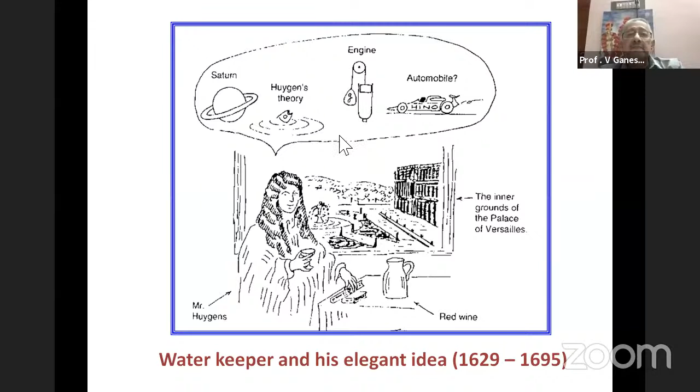And therefore the water keeper, his name was Huygens, thought that if he could have a mechanical means to lift the water from the well and pour it, it would have been wonderful. And this is the person, and his elegant idea came, as you see in this figure, and this is the engine he invented at that time.

This engine is called the gunpowder engine. This is the conceptual drawing for the internal combustion engine, which originated from Huygens in 1673.

Now, how exactly it works? If you see, you have A, B, C, D, etc. marked, and here is the place where he put the gunpowder, and this was the cylinder, and there was a piston. Huygens thought that if you could explode the gunpowder, the force will raise the piston up, and the bucket will come down and fetch water from the well.

And because he has provided the exhaust there, the exhaust gases will go out, there will be a vacuum, and the piston will come down. So by means of this reciprocating action of the piston in the cylinder, he could fetch water from the well and pour it. In the 1600s, it was considered a very elegant idea, and he utilized this principle to water the gardens.

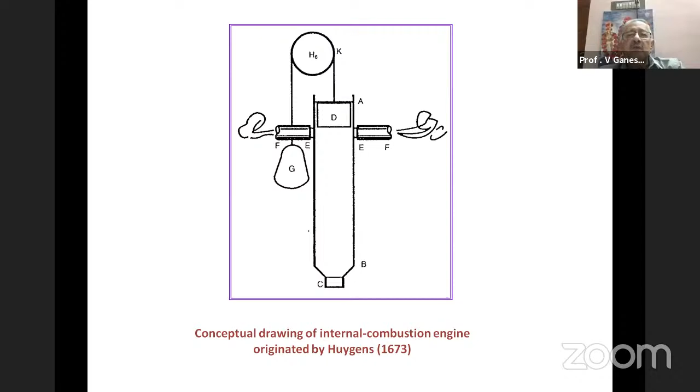Then what happened is, because of this invention, he could get into the mechanical means for getting some work done.

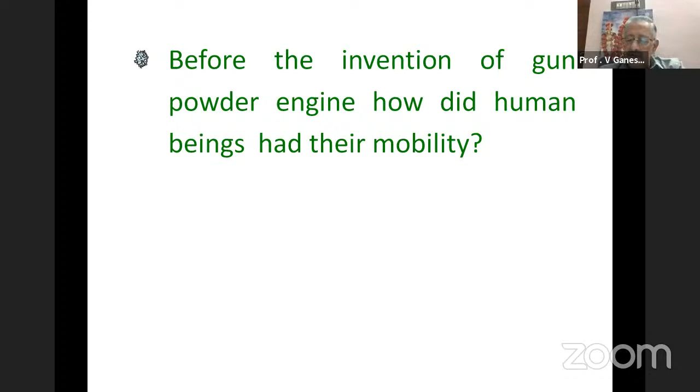But before the invention of the gunpowder engine, what did man use for mobility? If you see, it was through Shank's pony. Man utilized Shank's pony for mobility. But most of you may not be aware what Shank's pony is.

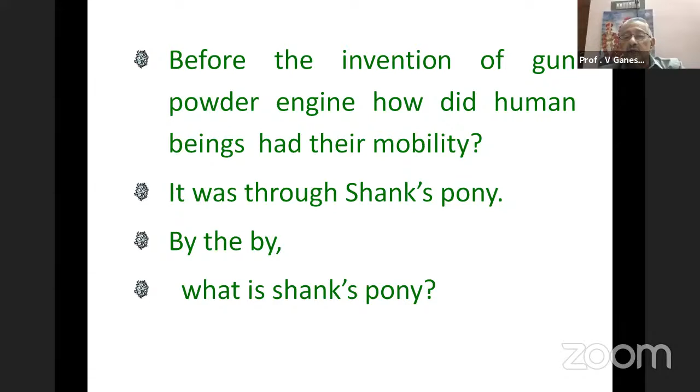I will show the next slide for a small duration, don't imagine too many things on that, and I will quickly pass on to that. This is what Shank's pony is, which is nothing but the human feet. The human feet was used for mobility.

Then people started using SUVs. SUV is nothing but the sport utility vehicle that we call it as the automobile or the car today. And if you see, a very interesting thing in the SUV, this is our original SUV that the man was using. And if you see this SUV and the present day car, verify it in your automobile, all the systems this original SUV had, we are having it in our automobiles run by engines.

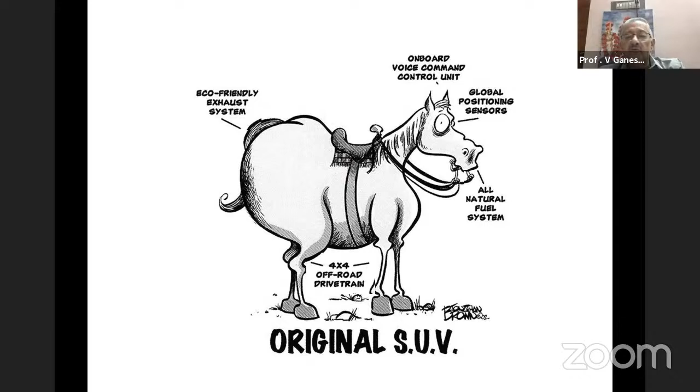Now, if you see, you have all natural fuel systems and eco-friendly exhaust system, then global positioning system, onboard voice command system, 4x4 off-road drivetrain, independent rear suspension system, a memory feature and braking, a strap and bit of steering, and luxury leather seating. And if you go and verify your automobile, all these systems are today available on your car.

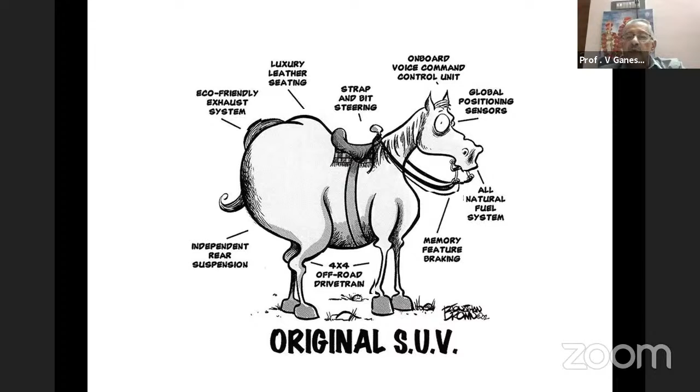So this is our original SUV, which man utilized for mobility, and we got rid of the horses and got into the engines today. So, but what is the problem of this SUV? Why could we not continue with the SUV? This SUV is mainly a problem because of pollution.

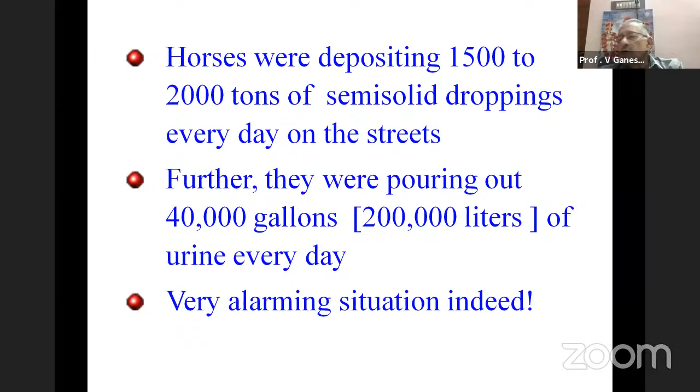What type of pollution did we face? The pollution that we faced is called the solid and liquid pollution. And from the literature, if you see, horses were dropping about 1,500 to 2,000 tons of semi-solid dropping every day on the street. And further, they were pouring about 200,000 liters of urine every day on the road. A very alarming situation it was, and people could not live with these horses because the number of horses was extremely large. So we wanted to get rid of these horses.

That means we faced pollution some 100, 200 years back, and today also we are blaming the automobile engineer for the same pollution.

Then what happened? Because man wanted to get rid of these horses, they wanted some mechanical means for transport, and then came the most interesting thing, the invention of two great pioneers. I would call them so great because today the entire world depends on automobiles. These two pioneers were named August Otto and Rudolf Diesel.

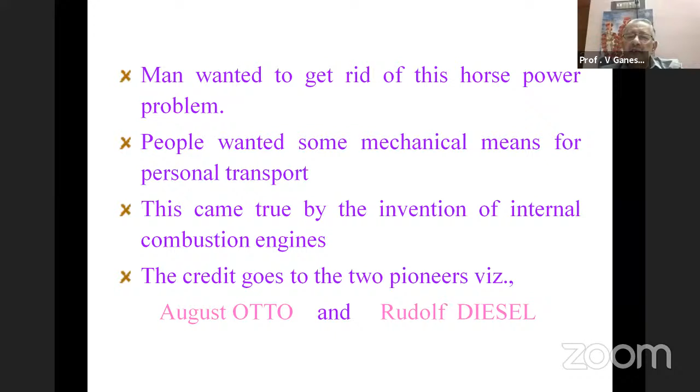Nicholas August Otto invented the spark ignition engine, which we call the petrol engine. And Rudolf Diesel invented the diesel engine. So if you see today, the cars or automobiles that we are using run basically on these two engines, and probably it's a great invention which has helped us for our mobility, but at the same time we are being blamed that this is mainly responsible for the pollution.

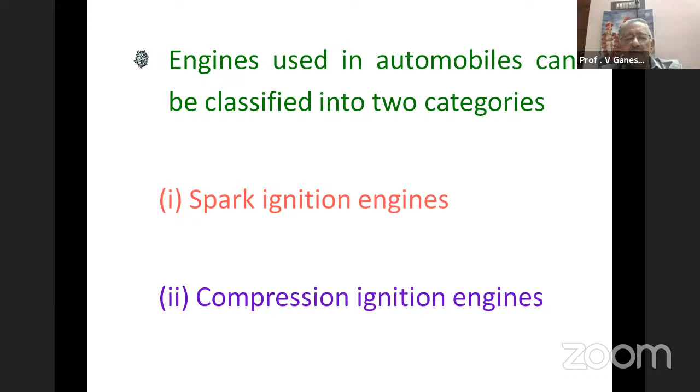So engines used in these automobiles as on today are of two types. One we call the spark ignition engine, and the other we call the compression ignition engine. And if you see the working principle of these two engines, they work on a 4-stroke, 5-event principle. Whether it is a petrol engine or a diesel engine, they work on the principle of 4 strokes and 5 events. These 4 strokes are suction, compression, expansion, and exhaust. In these 4 strokes, there are 5 events taking place.

The first event is the intake of air fuel mixture, and then compressing of the air fuel mixture. Then comes the combustion, and then expansion and exhaust. So there are two types of engines which use both the same 4-stroke and 5 events, namely suction, compression, combustion, expansion, and exhaust. And if you closely look at it, both of them are almost working on the same principle, whether it is a spark ignition engine or a compression ignition engine, the working principle is the same.

Many students used to ask me, sir, how to memorize which is the spark ignition engine and which is the compression ignition engine. What is the difference between them? They used to ask me, but I used to tell them very jovially: the difference between the spark ignition engine and the compression ignition engine is the difference between a love marriage and an arranged marriage. The spark ignition engine is the love married engine, and the compression ignition engine is an arranged marriage engine. Now, what exactly happens in this engine is what will happen to your life and all of our lives. For example, in the love marriage, what is taking place?

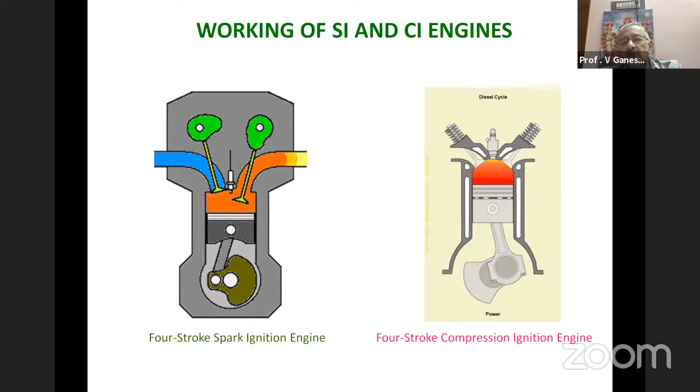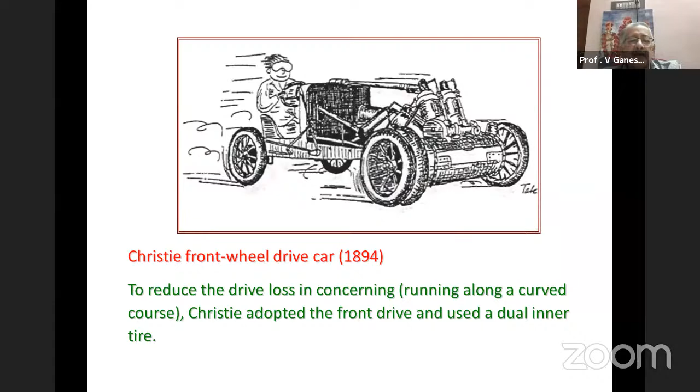The first horseless carriage came on American roads in 1895. Before 1895, people were using horses, and horses were polluting the atmosphere. After the invention of the petrol and diesel engine, in 1895 we could get the first automobile on the road. This is what it looked like in 1895.

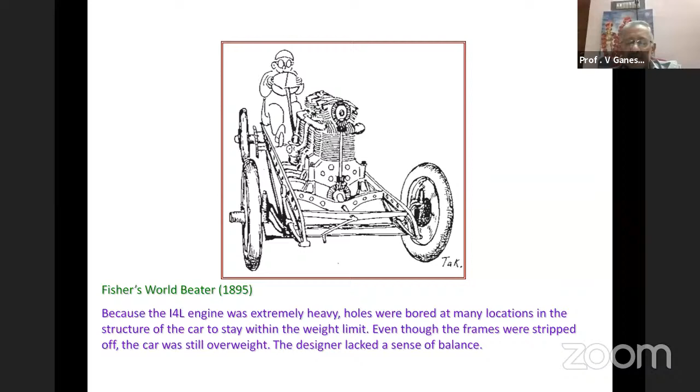Then a lot of advancement took place. But when the first automobile was seen on American roads, the US Congress, like our parliament, in 1895 gave this statement: they said that this discovery begins a new era in the history of civilization.

It said also, never in history has society been confronted with a power so full of potential danger, and at the same time so full of promise for the future of man and peace of the world. And they said the automobile is a wonderful invention, and one day it will become a great problem for society.

And today we are on the same road. As I said at the beginning, the horses were making pollution, dropping about 2,000 to 2,500 tons of semi-solid droppings on the road, polluting the atmosphere.

Today, if you take Chennai city, we have more than 1.5 million vehicles on the road every day, and we are polluting the atmosphere with products of combustion, more than 2,000 tons every day, in Chennai city alone. Also, these exhaust gases coming out of these engines are about 400 degrees centigrade, and that is increasing the temperature of the atmosphere.

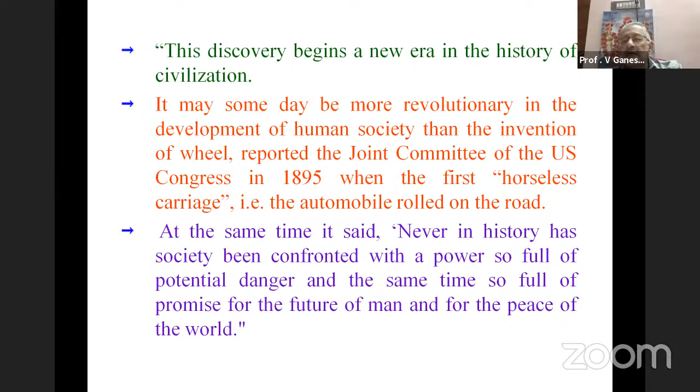And therefore, as they said, that one day this is going to be a problem — we are facing that problem today regarding pollution. So this statement became true today. It is believed that the automobile is the main contributory factor toward environmental pollution.

This puts the entire ecosystem under great strain. Pollution is putting the ecosystem under great strain, and therefore it becomes our duty to reduce this pollution.

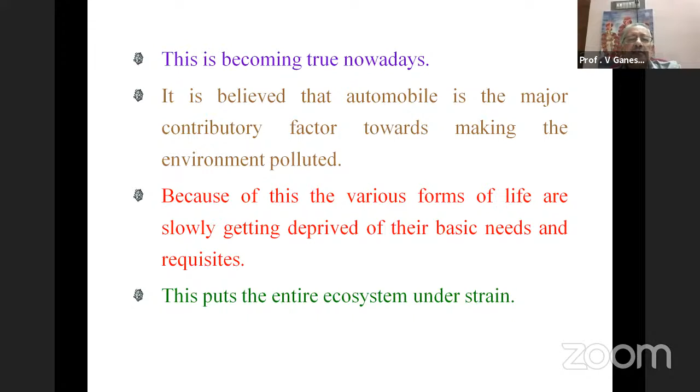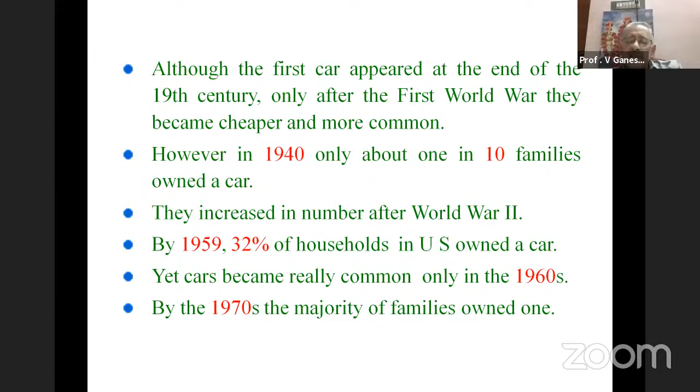If you go back into history, in 1940 only about one in 10 families owned a car, and this increased after World War II. By 1970, the majority of families owned a car. Today, probably one family owns 2 cars. That is the rate at which automobiles are being used, and there is a possibility that it will be a problem for atmospheric pollution.

People have started blaming automobile engineers for this pollution, but what I believe is that this is not the only source of pollution. There are so many other sources of pollution, and the way you look at the problem, you will get the result. So I would say the automobile is one of the sources of pollution, and you cannot blame mechanical automobile or combustion engineers for this.

I would put it to all my students and participants: look at it in a positive way. The automobile is a boon, definitely, but some people call it a bane because it is polluting the atmosphere. The boon or bane depends upon how you look at things. For example, the same problem you can look at on a positive side as well as a negative side. I will give a story on this.

One of the shoe companies sent a representative to a remote island where only Adivasis lived, and they wanted to know whether they could start a shoe company there. This fellow went there, studied the place, and found that nobody knew what a shoe or a chappal is. So he gave a report to his company: there is no point in starting any shoe company here, because there is nobody wearing shoes, there is no market.

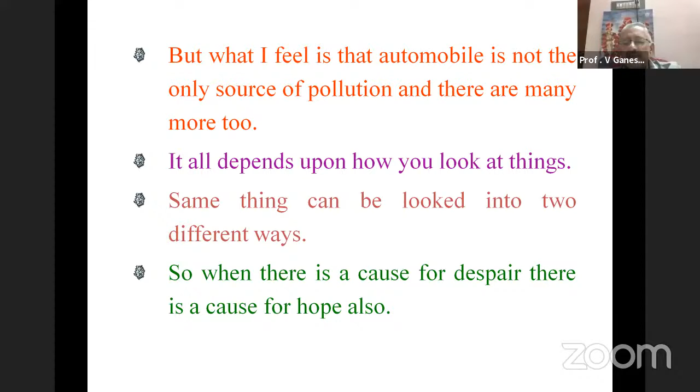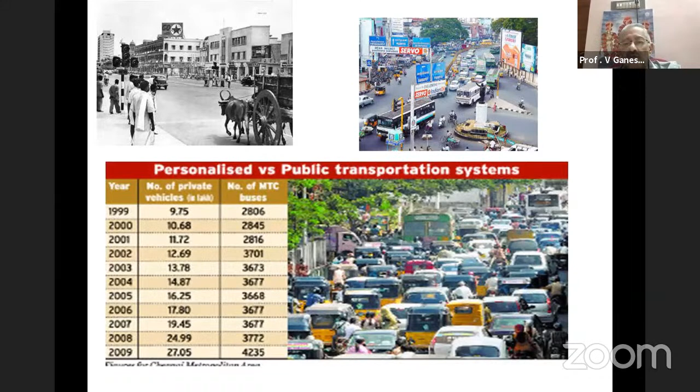We are making a lot of advancement in these automotive engines. There are two engines, petrol and diesel, which we call the conventional engines. And these conventional engines have to be modified to reduce the pollution and improve the performance.

But what is the problem? Why are we not able to do this? It is because whatever we have said about compression, expansion, etc., in my opinion, is only guesswork. We do not know what exactly is happening, like what we treat the corona today, the combustion process is all guesswork.

But fortunately, we have advanced in our theoretical studies, and the CFD studies have made things much easier, and thereby we could improve and make advancement in these engines.

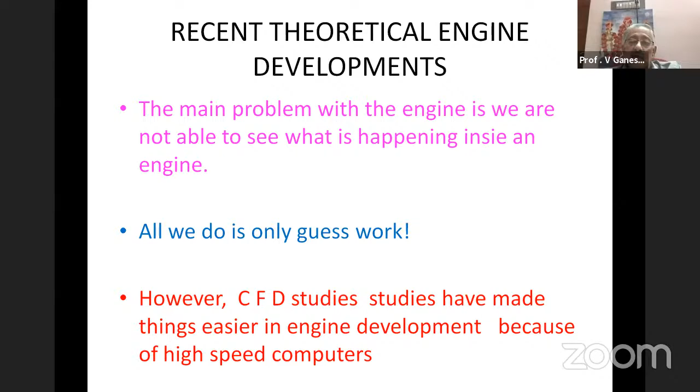For example, as I told you, there are about 15 students who worked with me for their PhD to improve automotive engines using computational fluid dynamics.

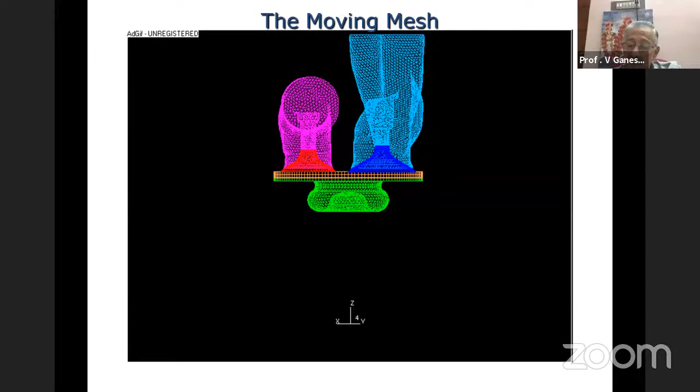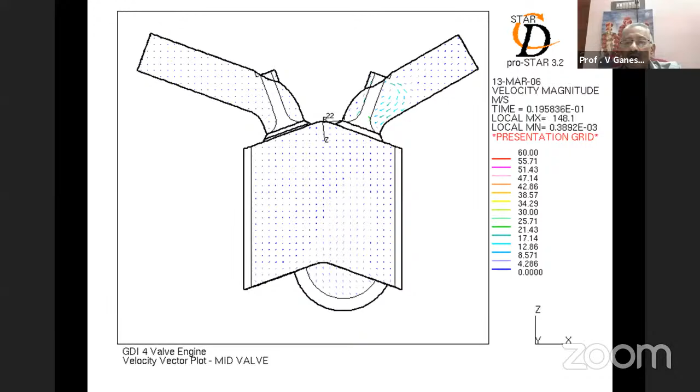By means of our computational fluid dynamics techniques, we are able to visualize - this is a theoretical visualization, not a practical one - how exactly the air fuel mixture flows into the combustion chamber, where exactly in an engine a problem is lying, and how to improve upon that.

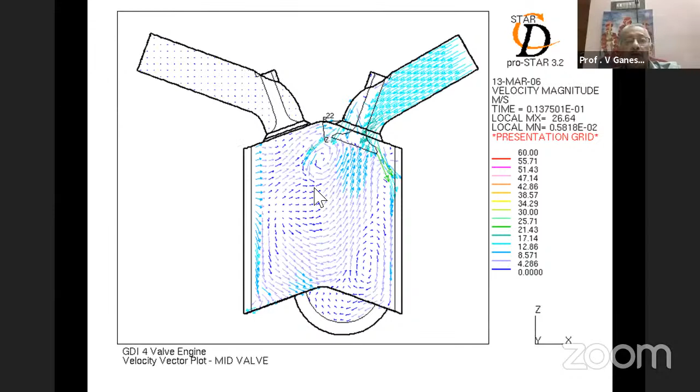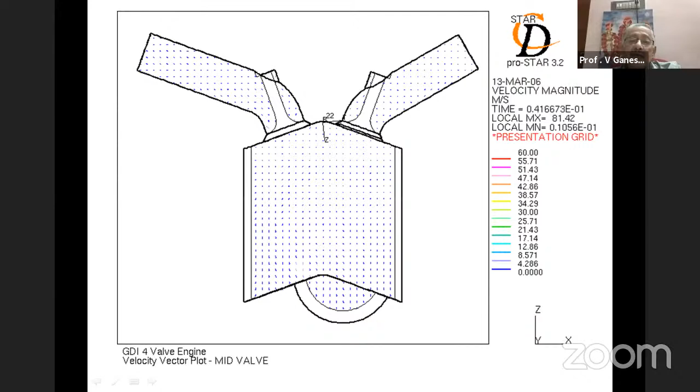We are now trying to do this. We are able to see within our simulation how the air movement is taking place, how it is going out, how it is coming in, etc. We are able to perceive this. Our computational fluid dynamics have increased and improved our understanding about these processes.

So based on that, we could do a lot of improvement. And the main problem is that the performance of the normal conventional engines is almost saturating, and therefore we are going for recent developments.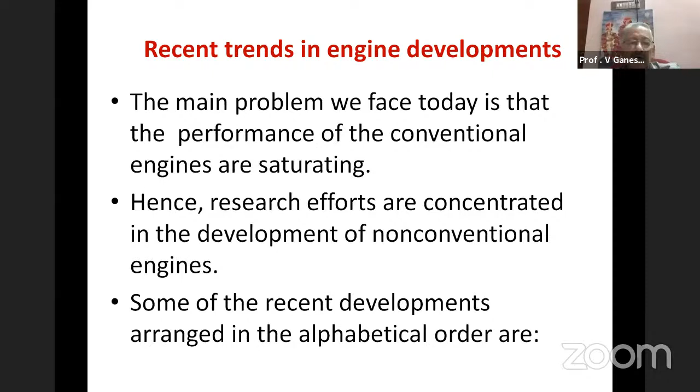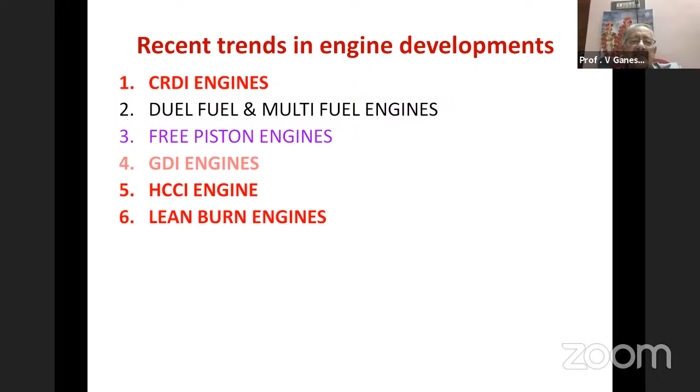So the recent developments are: one, the CRDI engine; second, the dual fuel engine; third, the free piston engine; fourth, the gasoline direct injection engine; fifth, the HCCI engine; sixth, the lean burn engine; seventh, the Stirling engine, stratified charge engine, VCR engine, and Wankel engine.

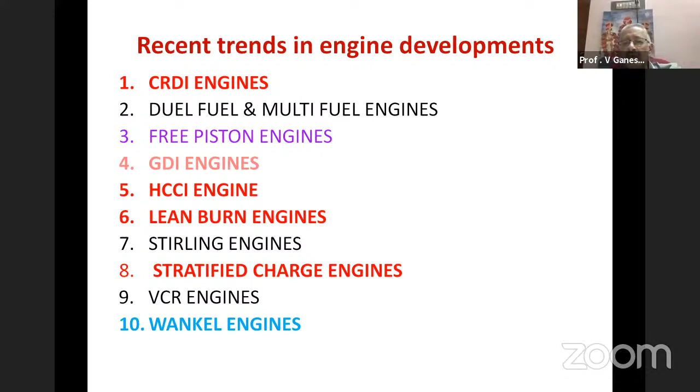So there are 10 advancements that have taken place on the engine side, but I will not have time to talk about all 10 engines, because each one I could talk about for an hour. Then you will miss our dinner also if we go into that.

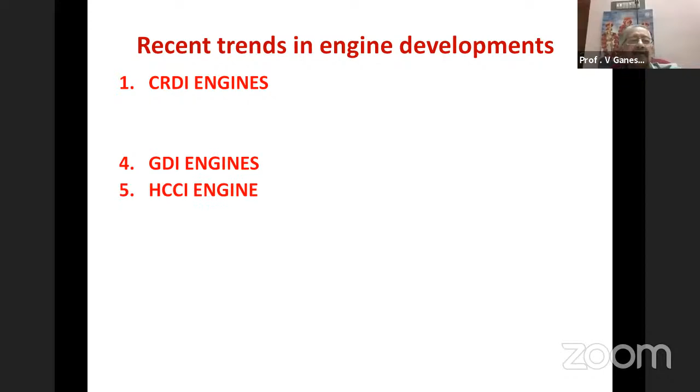And therefore, I am thinking of covering only some engines: the CRDI engine, then we will see the GDI engine, then the HCCI engine, and we will go for the stratified charge engines and the Wankel engines - I'm going to take 5 of them to discuss what is the advancement taking place in the automotive sector.

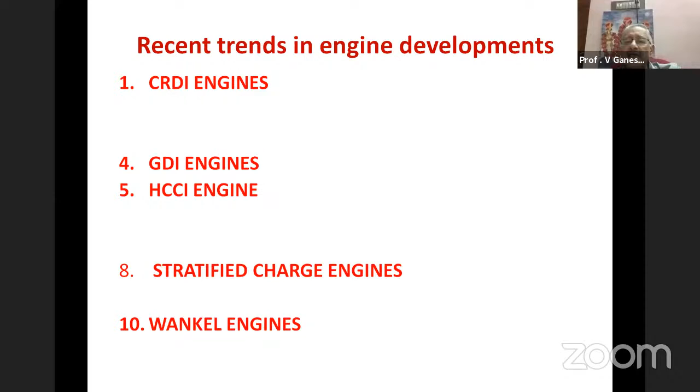First, we will go step by step. First, we will discuss the CRDI engine, that is, the common rail direct injection engine.

Now, what exactly is the problem with a diesel engine is that the fuel that is injected into the cylinder is injected in the conventional engine with a pressure of about 300 bars. This 300 bar is not sufficient to atomize the fuel, because diesel fuel is a little heavy, and therefore we require a higher pressure for atomizing it. And then came the technology called the common rail direct injection engine system.

Diesel particles are heavier, and because of the heavy particles, it causes more pollution and lower fuel efficiency. Therefore, we should inject fuel at a much higher pressure. Many people have tried from 300 bars to 600, 600 to 900. Today we are trying injecting the fuel at about

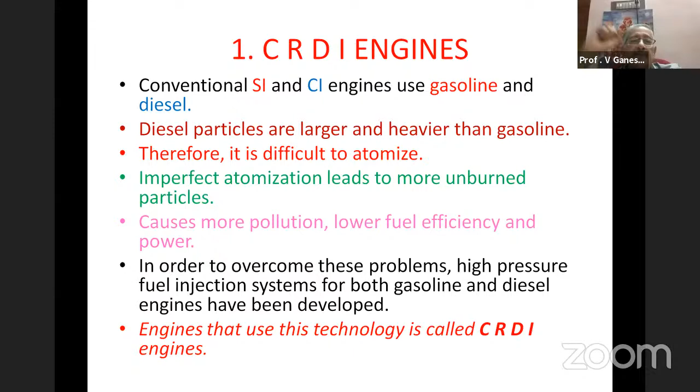1,500 bars. If you see the principle involved, there is a common rail. The fuel is pressurized and put into this common rail, which can be sent into the various cylinders at the appropriate moment.

A new injector has been developed, operated by a solenoid, able to distribute the fuel and atomize it, distributing it like this. Therefore, we are able to send the fuel in a finely atomized form. That will help us make the fuel evaporate faster.

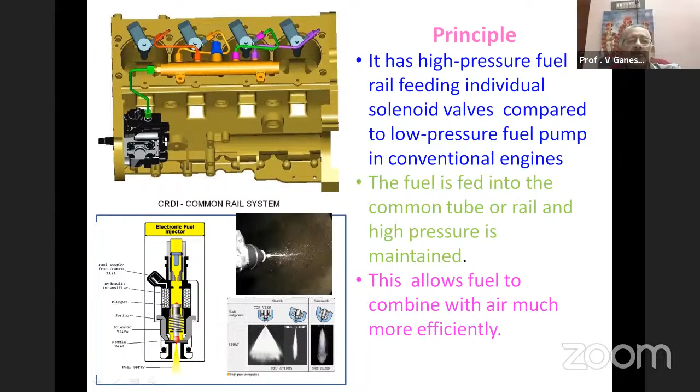Once you make the fuel evaporate faster, the combustion will be better. It will help the fuel combine with air, and we are able to do it much better in our combustion process. This system has been developed because electronics is coming into the picture.

If you see engines today, 30% of it is electronics and 70% is mechanical. But probably in future engines, 70% will be electronics and only 30% will be mechanical.

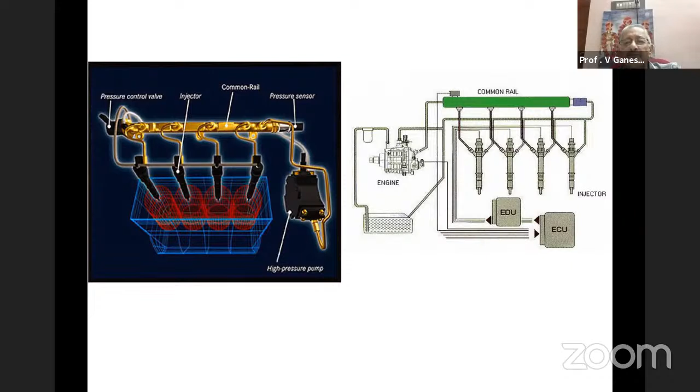We are using this type of engine to inject the fuel in a much atomized form. The electronics, electronic controlling unit, fuel pump, all these things are operated by electronics coming to our rescue, and we are able to inject the fuel in a much atomized form. Better combustion is taking place, and thereby pollution is reduced.

So the latest advance is the CRDI engine in the case of a conventional diesel engine. If you see some 30, 40 years back, the conventional diesel engine and conventional petrol engine - the petrol engine was a high-speed engine. Because petrol can evaporate much faster than diesel, it could be operated at a much higher speed than diesel engines. Therefore, today the diesel engine is also competing with the petrol engine in speed.

Originally, diesel engines could be run only up to 3000 RPM. Today, we are able to operate these engines at about 6000 to 7000 RPM. Whereas by using GDI technology, we are able to operate the petrol engine up to 10,000 RPM. Therefore, what was yesterday's petrol engine speed is today's diesel engine speed. This advancement has greatly improved the speed of the engine as well as improved the combustion.

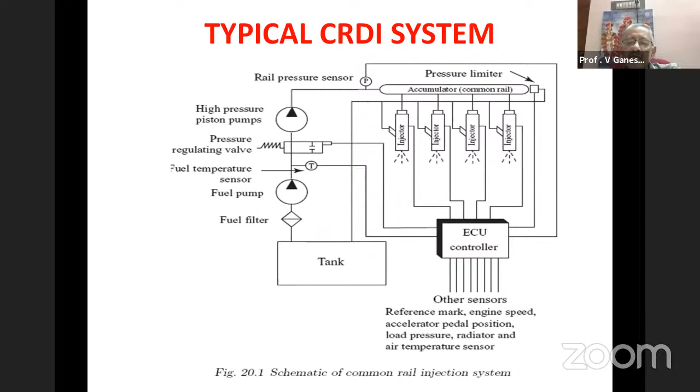We have designed the injector and spray pattern to suit the common rail direct injection system - we call it the CRDI injector. Like a mist, it is able to distribute the fuel, one in a fan shape, another in a cone shape. A lot of research went into this, and we are using this CRDI engine - the latest advancement that has taken place in diesel engines.

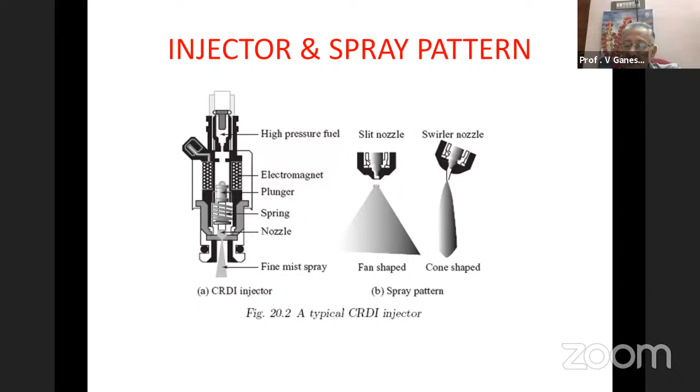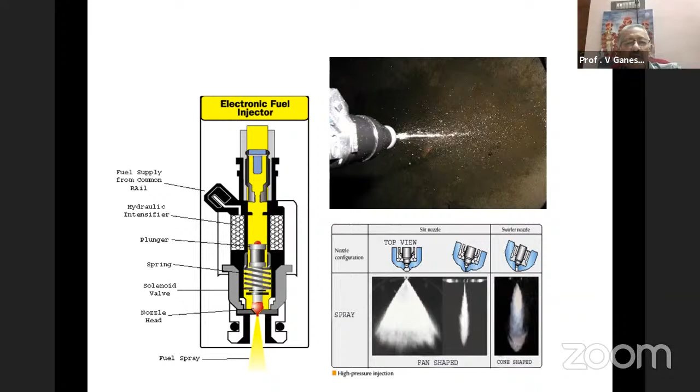For a better view of how this fuel is injected and gets accumulated, I have enlarged the figure to show you. So this is the advancement in diesel technology which we call the common rail direct injection engine, CRDI engine. The advantages and disadvantages are many - that is available in my book. I will be giving lectures, so we will not go into the advantages and disadvantages.

Then people thought, if we can do better with the diesel engine using the common rail direct injection system, why not try to inject petrol in our petrol engine? The gasoline direct injection system uses the same technology, and over time we are changing from the carburetor to the GDI engine - carburetor to gasoline direct injection.

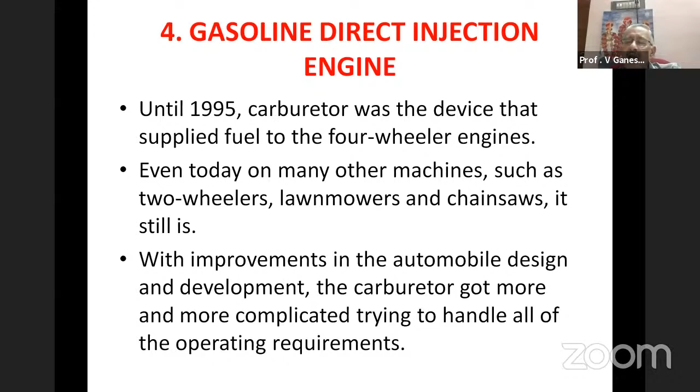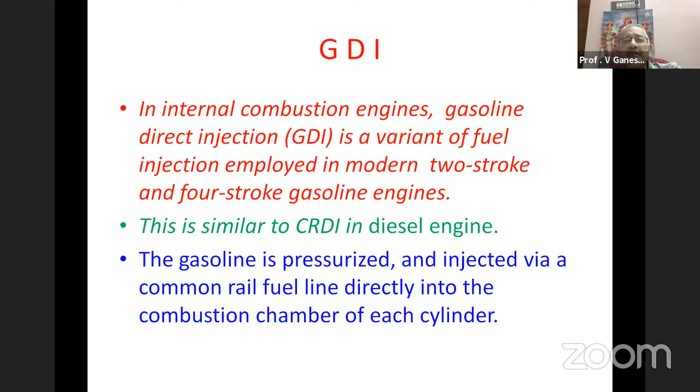Until 1995, the carburetor was the main source. With improvements in automobiles, the carburetor got more and more complicated, because every year the emission norms are becoming more stringent, and the carburetor is not able to meet the stringent pollution requirements, so we had to find something new. This is very similar to CRDI in diesel engines - we are using the gasoline direct injection system to inject petrol into the combustion chamber. If you see the evolution history of the carburetor until about 1995, the carburetor was there.

Then we tried injecting the fuel near the throttle. We started doing it from 2000, okay, about 1995 onwards, the gasoline direct injection system came into the picture.

The reason we could no longer use the carburetor is because of problems in performance and pollution. In a multi-cylinder engine, there is accumulation of fuel, so one cylinder gets an air fuel ratio which is rich, another correct, and another lean. So there was a mis-behavior of air fuel ratio across the various cylinders.

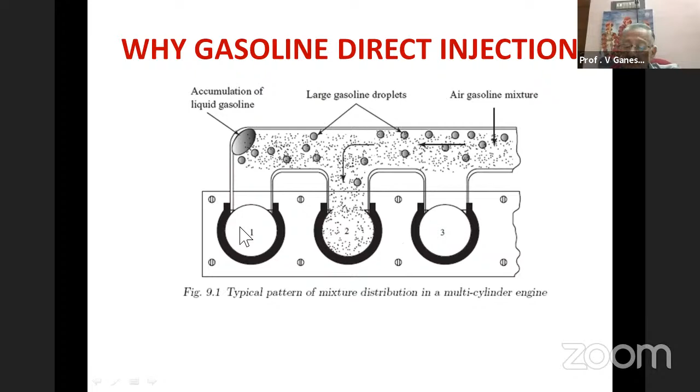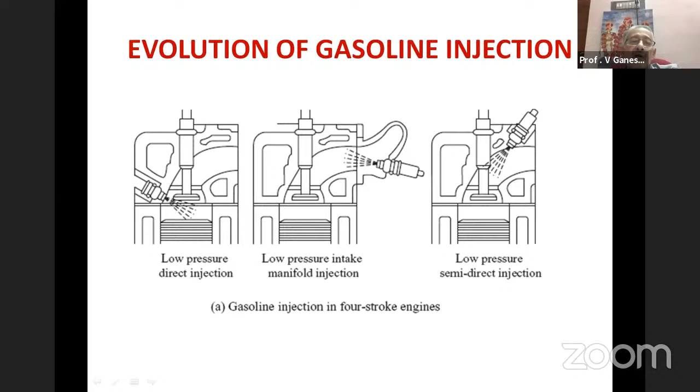To reduce this problem of non-uniformity of air fuel ratio across cylinders, the GDI engine came into the picture. Initially we had low pressure direct injection, low pressure intake manifold, and low pressure semi-direct systems. So gasoline injection for four-stroke engines evolved over time, and GDI became a boon, allowing us to increase engine speed from 6,000 to even 11,000 RPM.

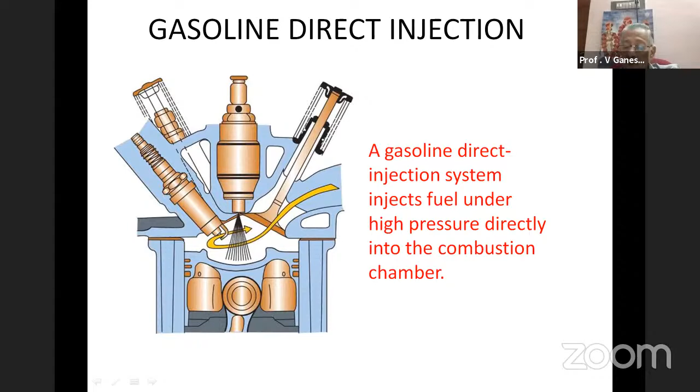By proper air movement into the cylinder, you get an air fuel mixture near the spark plug that is chemically correct. You inject the fuel and move the air so that you get an appropriate air fuel mixture for ignition. This requires variable piston designs, giving us spray guided, wall guided, swirl combustion, tumble combustion, etc.

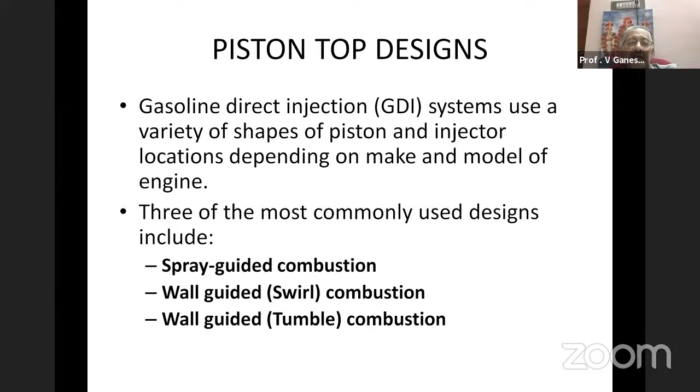I don't know how many of you already know about this, so I will not go into great detail, because if you do not know it may be a bit boring.

In spray guided design, the spray from the injector guides itself near the spark plug, where you get a fuel air mixture of about 14:1 up to 15:1, which starts ignition and lets combustion proceed much faster. Through direct injection of petrol into the cylinder, being highly evaporative, it evaporates quickly, in microseconds, forming a mixture for better combustion. That was spray guided; the other is wall guided.

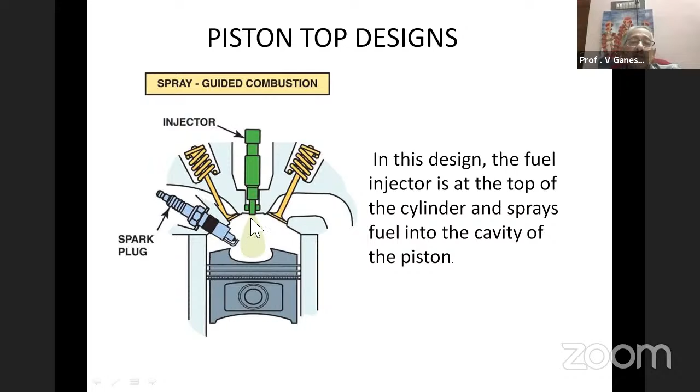The combustion chamber and piston top are designed and modified so that the incoming air carries the fuel near the spark plug.

All this is made possible through computational fluid dynamics, CFD, a very important tool for understanding the flow process inside the system. Using CFD we can create an air movement like this, carrying the correct air fuel ratio near the spark plug — this is what we call wall guided, guided by the wall.

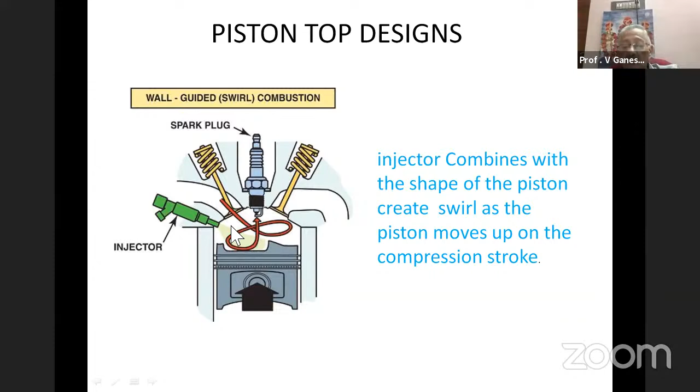There are two more types, one called swirl and another called tumble. I won't go into detail, but simply put, swirl is rotation about the vertical axis, and tumble is rotation about the horizontal axis.

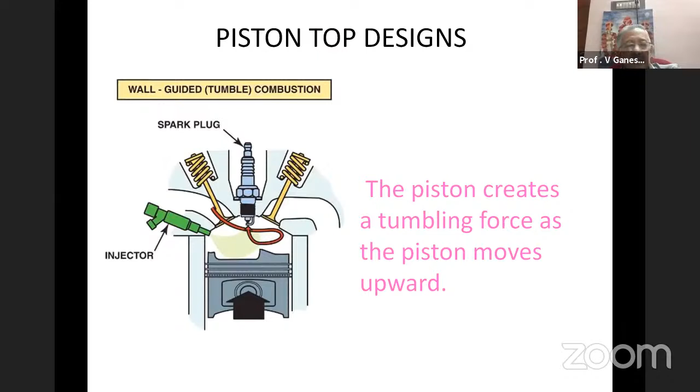So this engine development has taken place. Two important advancements occurred: in the diesel engine, we call it the CRDI engine, and in the petrol engine, the GDI engine. Then people thought, why not combine these two, taking advantages of both the diesel and petrol engines, to create a new type of engine called the HCCI engine — Homogeneously Charged Compression Ignition engine.

Homogeneously charged is the spark ignition engine, and compression ignition takes place in the diesel engine. Putting together we call it the HCCI engine. So why HCCI engine? The SI engines have very low NOx and particulate matter emissions, while CI engines have higher efficiency. So we wanted to have the cake and eat it too, to have both the advantages of both engines. And then came the concept of homogeneously charged compression ignition, a positive alternative for improving efficiency while lowering NOx and particulate matter.

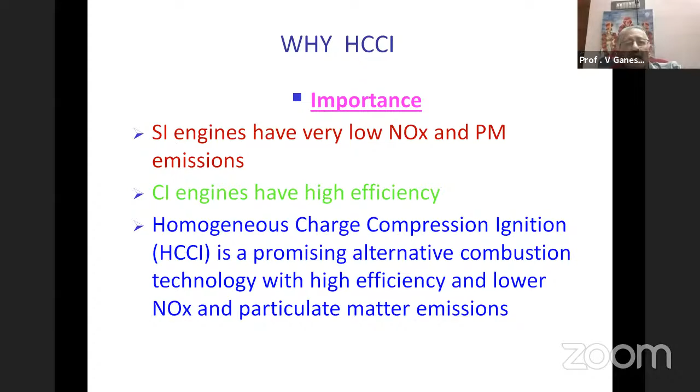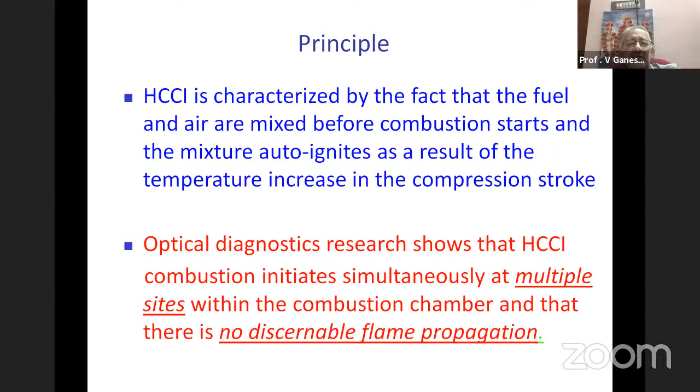So in a gasoline engine, how does combustion take place? At the spark plug, ignition occurs and the flame front starts traveling, and combustion progresses that way. In a diesel engine, fuel spray takes place and combustion occurs at various places simultaneously. So combining both advantages, combustion as well as auto-ignition taking place at many sources, the homogeneously charged compression ignition engine has both the advantage of the spark ignition engine and the compression ignition engine. So ultra-low emission comes into the picture in the case of the HCCI engine.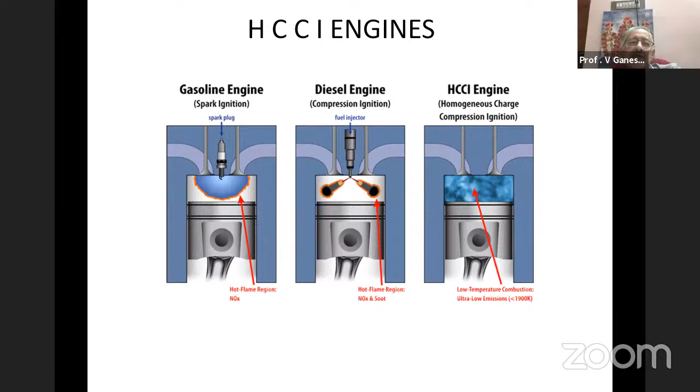Then people thought about using the concept of the HCCI engine. Initially we had an engine called the stratified charge engine. Now, all of you should understand that the best air-fuel ratio for combustion is 14:1. Between 14:1 to 15:1, if you're able to send the mixture and ignite it, you get the best possible result. We tried various possibilities and methods for this, and that is how the advancements came about.

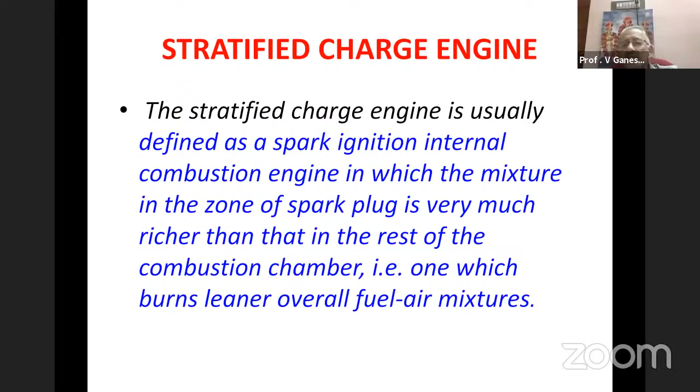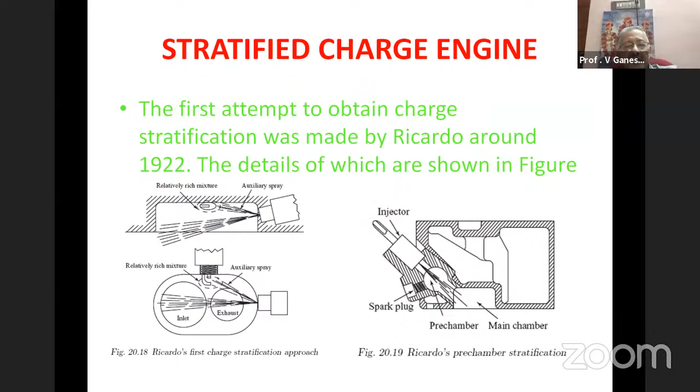What is the principle of charge stratification? It means we would like to operate the engine at a very high air-fuel ratio overall. At the time of ignition near the spark plug, we have about 14:1 or 15:1 air-fuel ratio, while all the other places have more than that. In this technology, the injector is split in such a way that near the spark plug you have one air-fuel ratio, and in the main chamber you have a different air-fuel ratio. This different concept came into picture, and different people started working on it, each one getting their PhD by working on that.

So different concepts came about, and explaining each one would be too much for you to understand. What is important at this point is that charge stratification, while not exactly the same, is very similar to the homogeneously charged compression ignition engine, in that we have a different air-fuel ratio at different places.

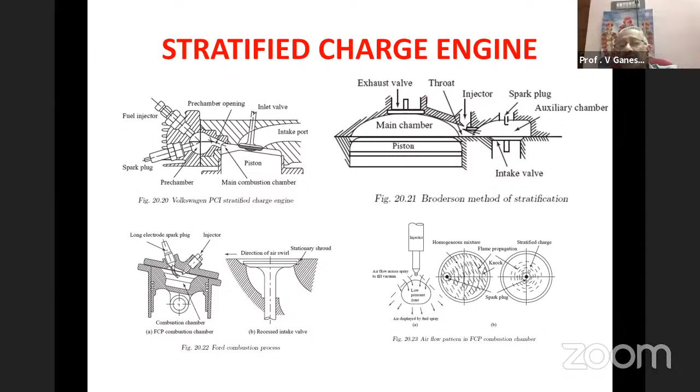So a lot of things came into the picture. I would also like to touch upon the other engine, which we call the Wankel engine. The lean burn engine and charge stratification are very similar to it. In 1950, Felix Wankel invented this engine, which we call the Wankel engine. I would say this was an invention ahead of its time, because in 1950 the material technology had not improved to that extent, and the whole thing was overheating. I would rate this Wankel engine as a rotary engine, and it was considered best for automotive purposes.

But a lot of research is still going on, though it found a natural death eventually. This one engine is equivalent to 3 cylinders, that is what was being used. There were a lot of problems, and therefore Felix Wankel could not succeed with it. Overheating of the rotor and a lot of other things took place, so I will leave it at that. This engine is used by the Japanese, and we are also trying to improve upon it.

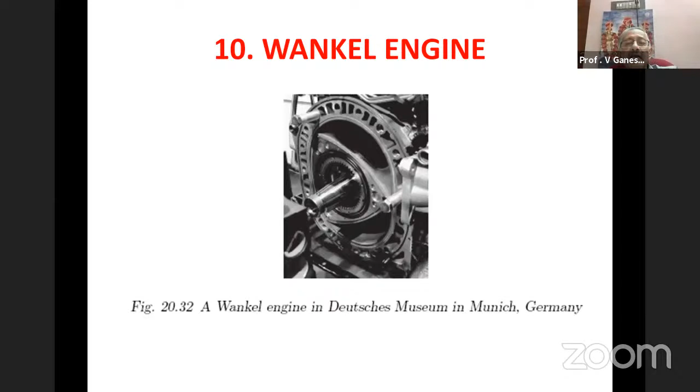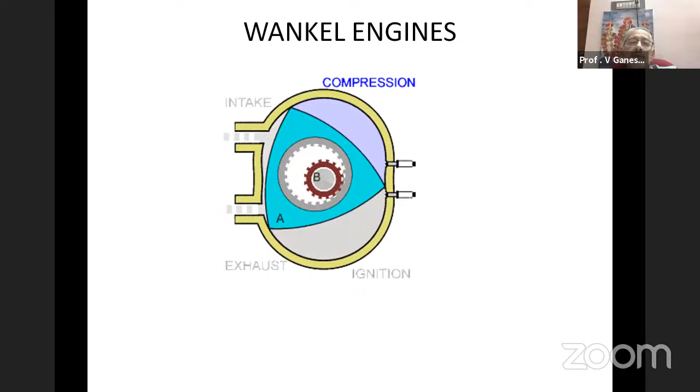A lot of developments are taking place in the area of automotive engines, where a lot of research is going on in computational fluid dynamics, coming a long way for making engines work better and better. So the Wankel engine, again, suction, compression, all those things are taking place in that.

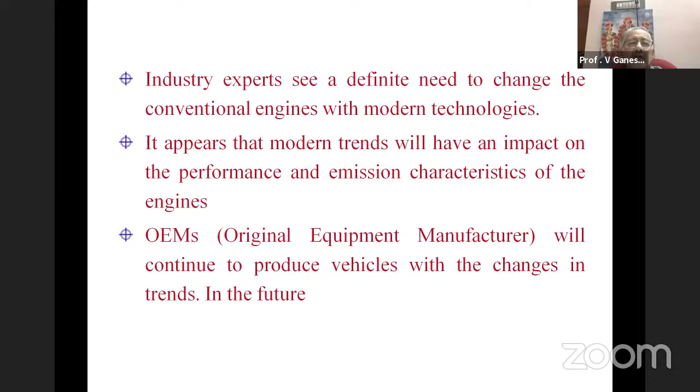Now we are finding a definite change in the market. The original conventional petrol and diesel engines we are using are getting replaced by the advancements of CRDI engines as well as GDI engines. But the success depends upon the cost involved, and it depends on how the OEMs are trying to do it. So the popularity of the modern trends will continue depending upon your consumer, they have to find the right price and the right demand, etc.

But the problem will be for the automotive industries, because most of them are going to be operated by electronics. There is nothing like repair anymore. If something goes wrong, you take the printed board out, throw it, and put a new board in. And therefore, the automotive service sector has to change into this.

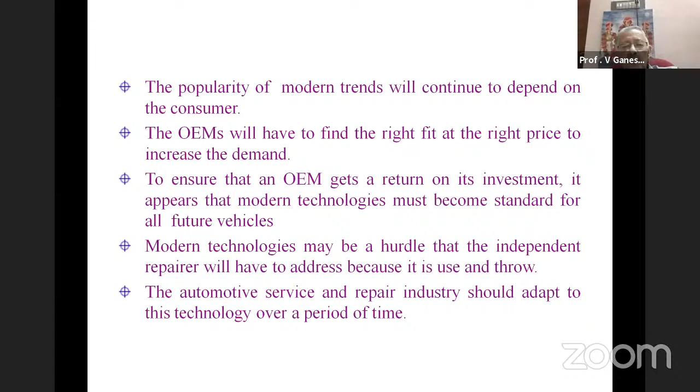Just like computers, cell phones, and the internet, which were once new technologies, recent trends will also be integrated into our daily lives in the near future. Some independent repairers may feel this trend as a dark cloud over the industry. Others will see it as a green light. As I told you, every problem has a solution except Corona. We are facing that one, but all other problems have a solution, we just have to find the right solution.

Pollution is a problem, but I would say don't look at the problem, look at the solution. Now let's see two interesting episodes that have taken place.

For example, when NASA began launching astronauts into space, they found that the pens they sent with the astronaut would not work at zero gravity, the ink was not flowing. To solve this problem, it took the Americans a decade. They developed a pen that could work upside down, etc., spending about $12 million to develop a pen to write anywhere, on any surface, at any time, in any environment. Because they looked at the problem and tried to get a solution to that.

So what did the Russians do? They sent a pencil to the astronaut, which solved the problem. So the Americans looked at the problem, and the Russians looked at the solution. Therefore, I would request you always look at the solution, don't look at the problem. Find the easiest solution to that.

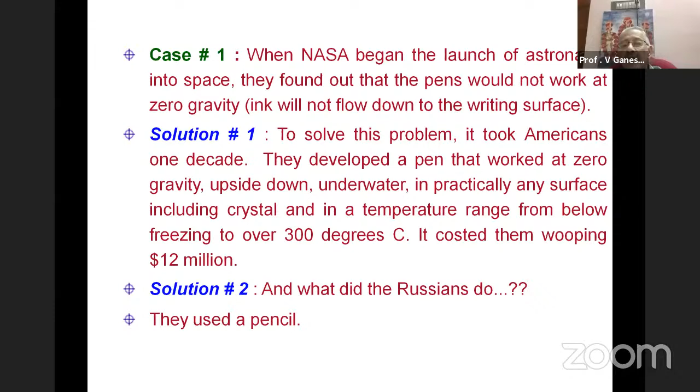One of the most memorable case studies in Japanese management was the empty soap box, which happened in one of Japan's cosmetic companies. The company received a complaint that a consumer bought a soap box that was empty. He made a big complaint to the company, and the authorities thought this should not happen, and they wanted to find a solution to it.

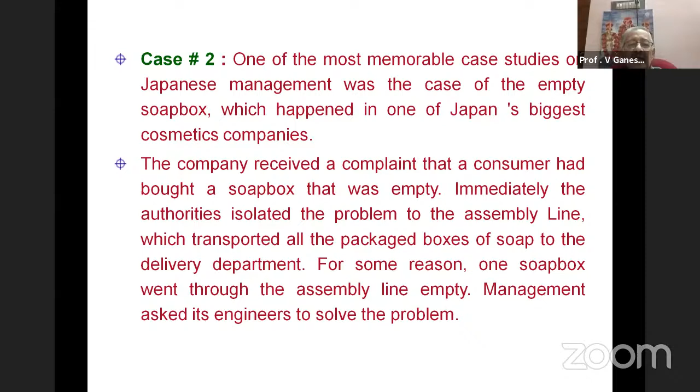They asked their engineers to do it, and post-haste the engineers worked hard to devise an X-ray machine with a high-resolution monitor, manned by two people, to watch all the soap boxes that pass through the line and make sure that none were empty. They spent about $1 million to solve this problem.

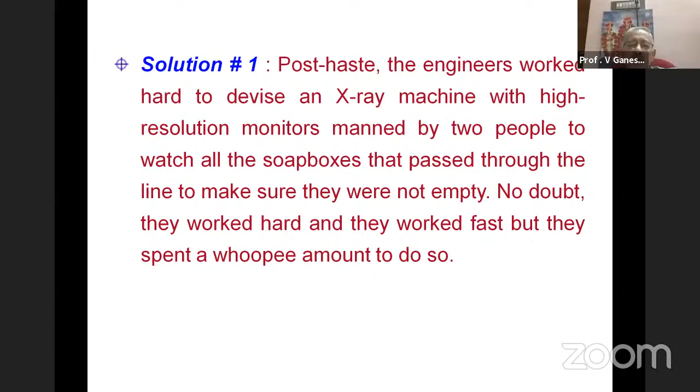Then what happened? A worker in a small company said all this is nonsense, you should not use X-rays. Instead, switch on a fan, and the empty boxes will simply get blown out by the fan. So this solution cost only 1,600 rupees.

That is what is happening. And therefore, what I would always say is to look for a simple solution and devise the simplest possible solution. Always focus on the solution and not on the problem. Take each challenge not by asking why you cannot do it, but by seeing how to do it, somehow.

Whether hard work, knowledge, money, love, or luck is important - I'm asking which is the most important thing in life. I would say not all these things are equally important, though they are all important. In my opinion, attitude and discipline are the most important things in one's life, because that is what makes a person's life full. Have a positive attitude and good discipline, and you will make your life very successful. Thank you very much.